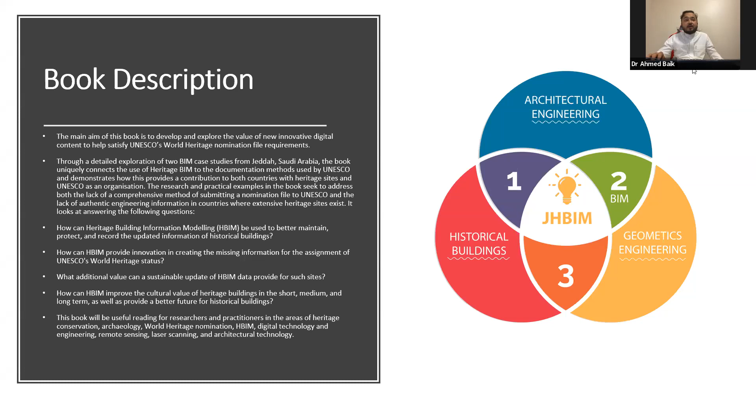This book will be useful reading for researchers researching archaeology, World Heritage nomination files, HBIM, digital technology, and of course architecture, remote sensing, laser scanning, and architectural technology.

Table of contents: the book will talk about different areas. The first area is the introduction, and the second chapter will review the UNESCO World Heritage nomination file, as well as building information modeling and heritage building information modeling as a literature review.

Then we have the third part, about a new model for the UNESCO World Heritage nomination file. The fourth one is about Jeddah heritage buildings and the case study, which is in chapter 4, along with the method and technology I used. Lastly, there's the conclusion, followed by the bibliography and the index.

So details about the chapters: review of UNESCO World Heritage nomination files and BIM and Heritage BIM. Readers will find a lot of information about the literature review on these topics. After that, a new model for UNESCO's World Heritage nomination file, summarizing the whole process. Chapter 4 is Jeddah Heritage BIM, the case study, showing how we can implement BIM techniques in the nomination file process. Chapter 5 is the conclusion, and chapter 6 is about future work and recommendations.

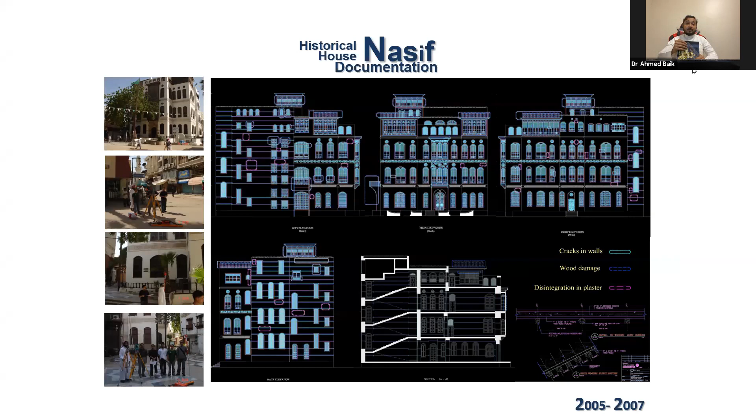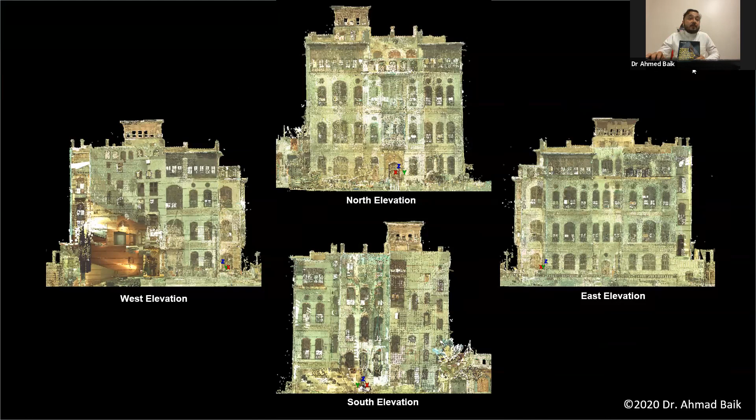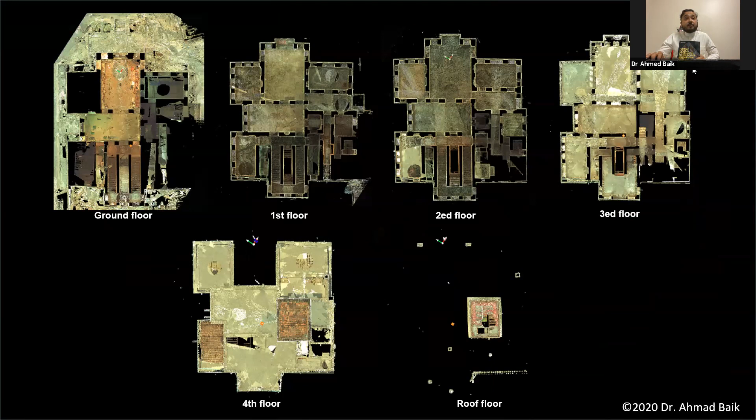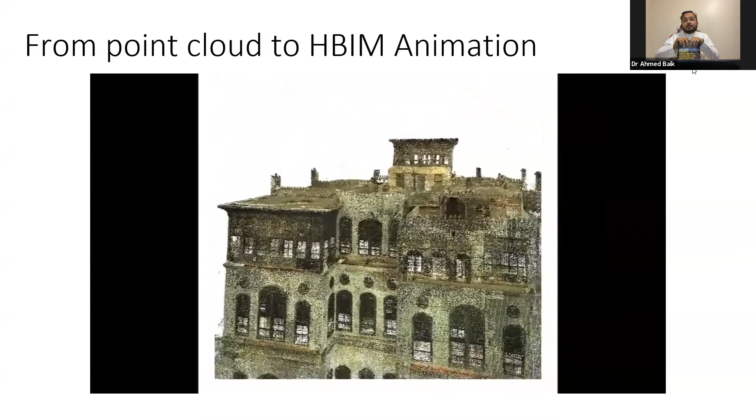Here we modeled all the data received from the laser scanning into a BIM environment, providing a very high level of detail, LOD 500, sometimes referred to as as-built level of detail.

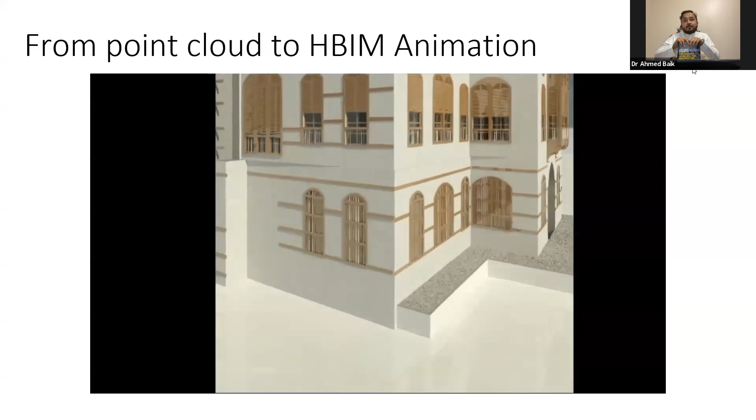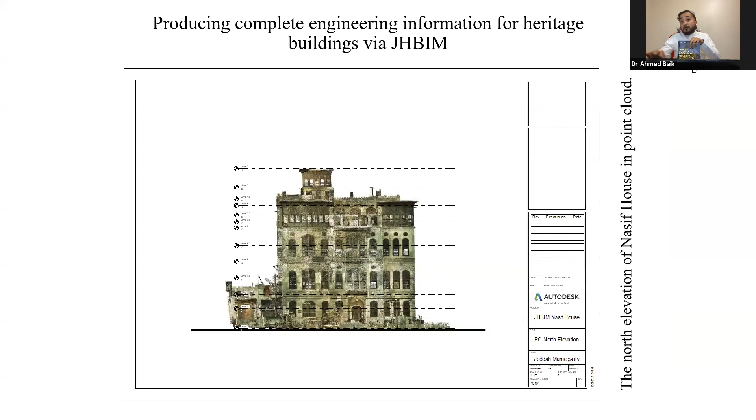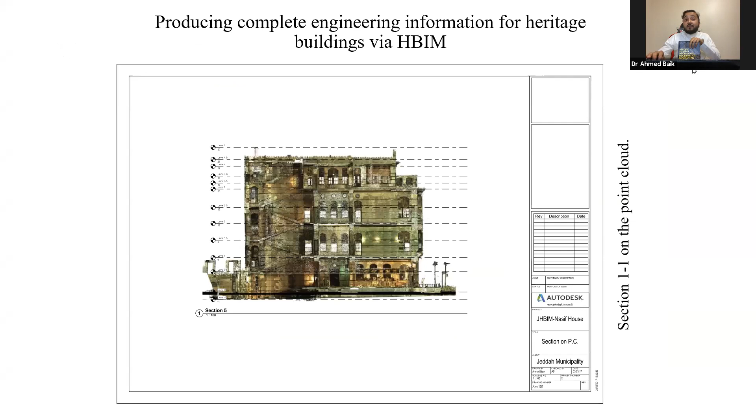Here are some of the engineering documents we produced from the BIM environment, including section types, with high accuracy for the sections, elevations, and plans.

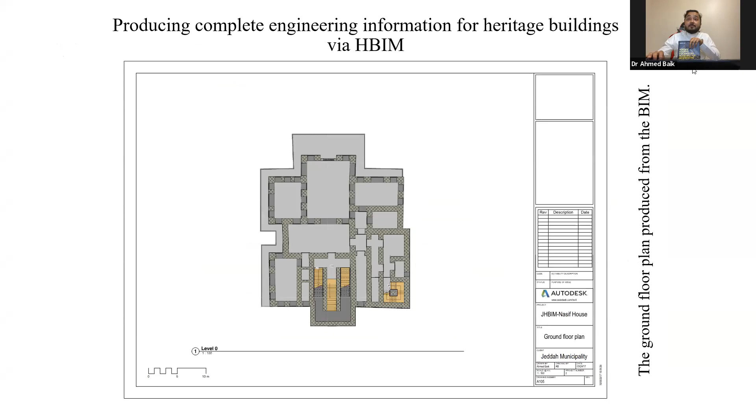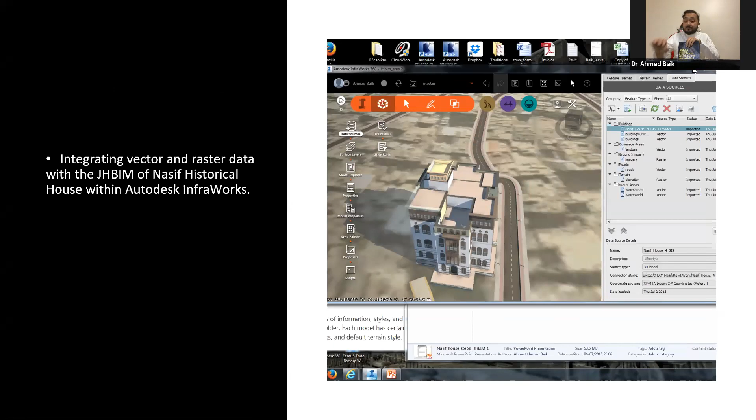After that, we integrated all the documents into InfraWorks, including all the GIS data, vector and raster data, to provide complete documentation. The main idea is to provide a complete 3D model containing all the documents and necessary requirements for the government or committees such as ICOMOS, or even the World Heritage Center.

That's it, and thank you for your attention.

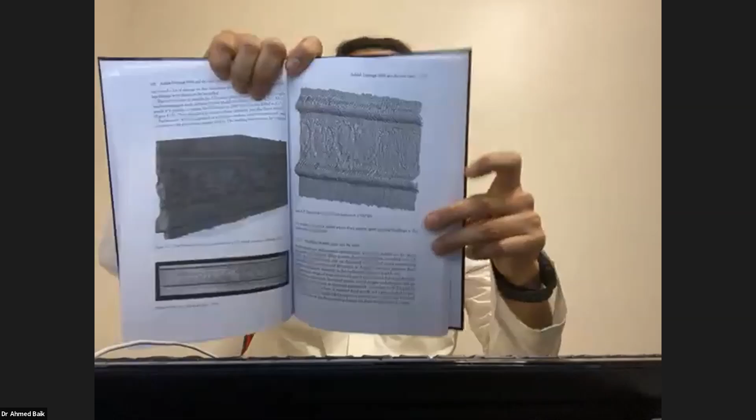Let me stop sharing my screen so we can see it. Just a second. Yes, right. These are some of the decoration stuff and the facade. We documented all these based on laser scanning, and even here you can see the steps of the modeling, how we model the roshans.

Sorry, yeah, here, starting from here to here, okay. It's down, up, up, down, up, down, yeah. Okay, it's a little bit confusing, right? And even here, I'm going to show you how to model the sheesh, as you can see. The sheesh is a kind of part of the roshan, which was done in this page here, right? Okay.

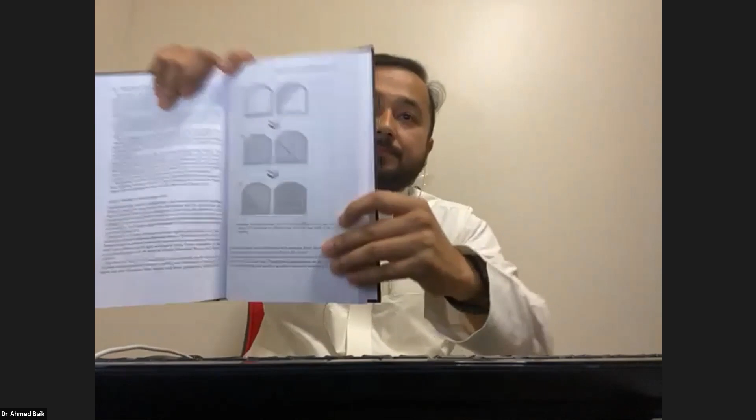Is it clear? Okay, so yes, the steps are clear. We studied the technique of modeling these elements, so as to provide complete models and components for the sheesh, roshan, and these kind of elements.